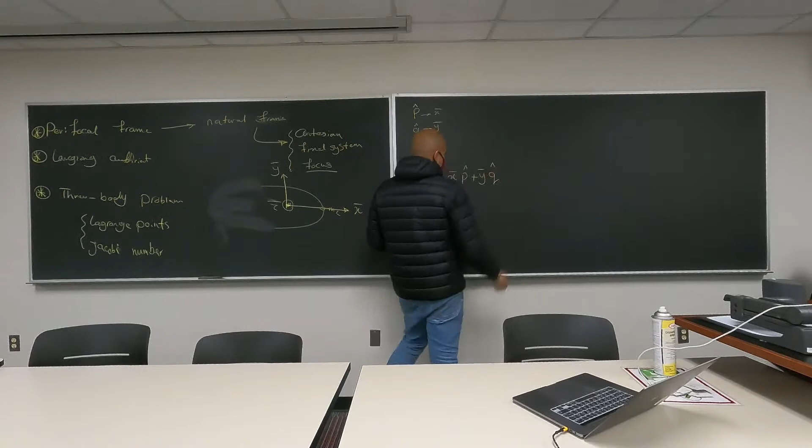You can define your R as X bar P plus Y bar Q hat. And the relationships between the cylindrical coordinate system and the Cartesian coordinate system are applied here. So your X bar is R cosine of theta, and Y bar is R sine of theta.

We have already said that these two lie on the same plane, meaning that this orbit is essentially a two-dimensional thing. But why do we introduce a third dimension when we are talking about this perifocal or natural frame? Why do we do that? That's my question for you.

What is the parameter that is in that direction, normal to the board here? Is this the right-hand rule with the up vector outwards? Yeah, that's the direction of the Z coordinate. Is that your question? So, does it?

Never mind. What is the parameter that is directed outward or inward, perpendicular to this natural frame? What is the direction of R? Something like this, right? What is the direction of velocity? Tangent to the plane, right? Or R dot. Doesn't really matter, it's to velocity.

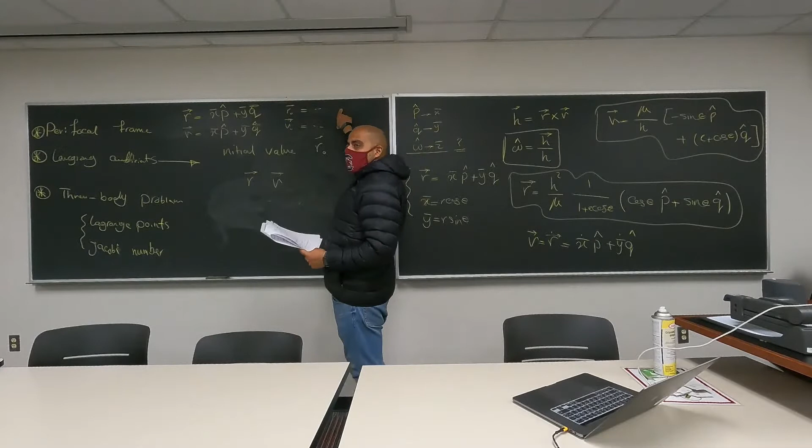So in a perifocal frame, your R is going to be equal to x bar p hat plus y bar q hat. V is going to be equal to x bar dot p hat plus y bar dot q hat. And we can write the same thing for R naught and V naught: x naught bar p hat, and so on and so forth. The idea here again is to use these two that are given to us and find this new R and V at a different time step.

We have all of the orbital equations, we have a lot of things that we can actually employ here. And what we want to do with Lagrange coefficients is to simplify the calculations, to come up with some parameters that will help us just plug in some numbers and find the new R and V based on R naught and V naught. If you do the analysis, you will get to these two main equations that relate your R and V to R naught and V naught.

R is F times R naught plus G times V naught, that's one Lagrange coefficient, and V is going to be F dot R naught plus G dot V naught. So these four are called the Lagrange coefficients that are going to help us find the parameters R and V at a later time. But I'm not going to go into the proof of these, we are only going to focus on the final equations and the concepts. Again, these four Lagrange parameters are going to help us find R and V at a different time, after some time has already passed.

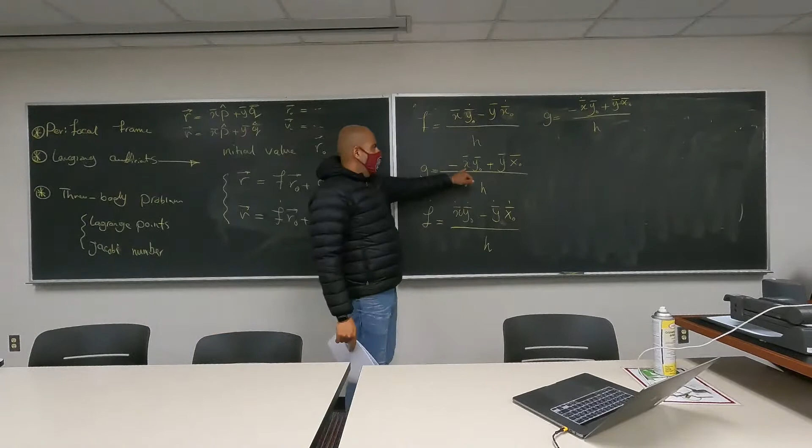Well, as you can see here, what do we have in these formulas? We have the presence of x bar and y bar, which are essentially the x and y in the future point that you're looking for. So this solution is not very helpful for us, right? Although these are the Lagrange coefficients, these are the first thing they derive, but it's not very helpful to us.

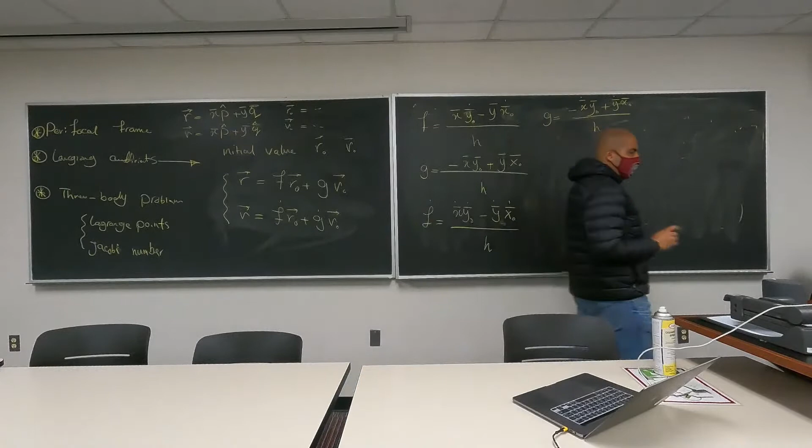So what can we do to eliminate this problem, to essentially only have one parameter from the second orbit, which is going to be the true anomaly, right? And then find it out. So what we want to do is to find these four coefficients based on delta theta, the true anomaly. Theta is the true anomaly at the second position.

This is something we need to have, right? Because we want to find R and V at the second true anomaly. That's the idea, right? That was the first thing that we started this whole thing. And theta naught is also given to us, right? This is something we already have. Okay?

So, plug in the values again. Your F based on the delta theta is going to be 1 minus mu r divided by h squared, 1 minus cosine of delta theta, right? Here G is going to be equal to R R naught over h, sine of delta theta, right? And your F dot is going to be equal to, this is a long equation, mu divided by h, 1 minus cosine of delta theta divided by sine of delta theta,

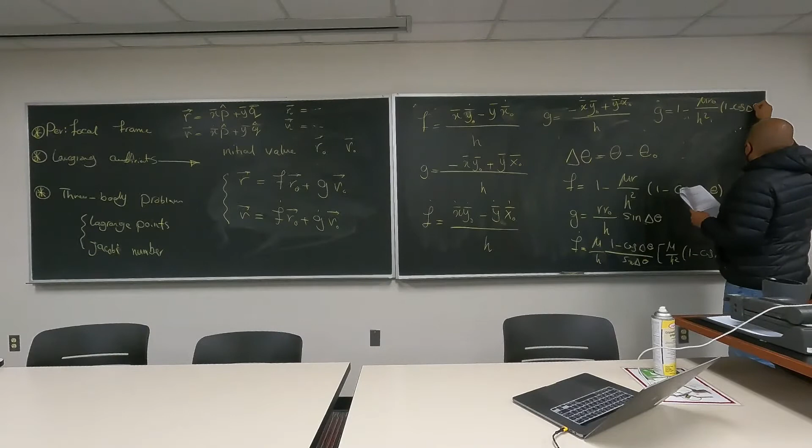Okay, so what are the parameters we have here? We have delta theta, which we can easily find, right? This is essentially given to us. We have R naught, which we can find based on the orbital equation, right? But there is one more thing that we don't have, and finding it is going to be a little bit harder for us. R, right? It is the magnitude of this vector, this future vector.

So we have another equation for that magnitude of the future vector that I'm going to write here. We can find R using something that is similar to the orbital equation, the main orbital equation, but only uses delta theta, doesn't use theta for that matter. Cosine of delta theta, this is minus, all of this is in the denominator. H V R naught divided by mu, sine of delta theta.

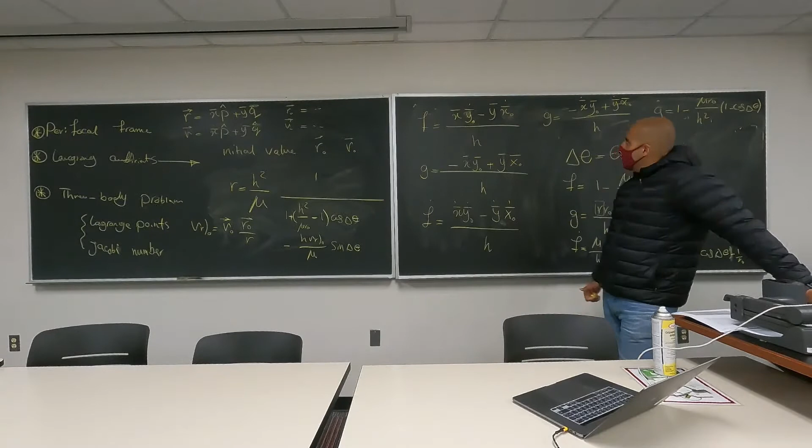Okay, so you're actually going to come back to this. Let's actually do it right now.

Let's solve an example. But before solving an example, take a look at these equations. We have this given to us, as well as R and V, right? Some form of them is given to us. F, G, F dot, G dot, and these equations are going to help us find a future orbital position and velocity, right? Find it from the initial value of that orbital position and velocity.

What is a very important parameter that we don't have here? Just look at these equations. What is missing in these equations? In these equations that I have, this one, these three, and these. Momentum, angular momentum, right? It is here. It is eccentricity, right? So we are missing the eccentricity, or not missing, you don't need to have eccentricity if you use the Lagrange coefficients, right?

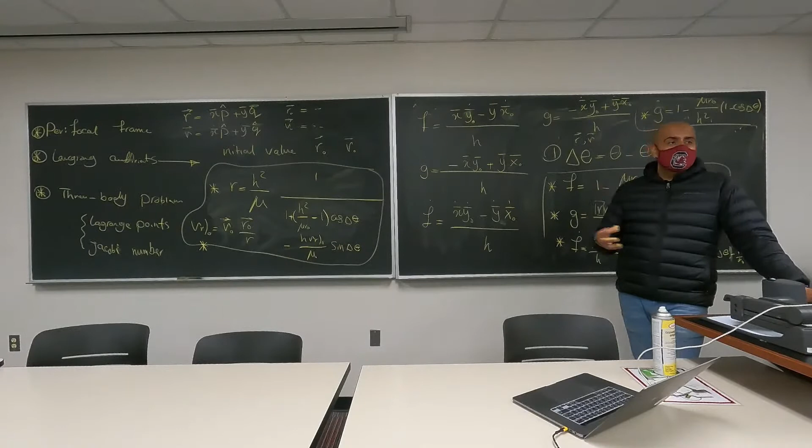What does it mean? This essentially means that we don't need to know what type of trajectory or orbit we have here. Is it elliptical? Is it circular? Is it a parabolic trajectory? It doesn't matter. We don't need to calculate eccentricity, which means that in some ways it's going to make everything easier if you don't need to determine what type of orbit you have. You just want to find the second position using the initial position, right?

Okay, let's take an example. There is example 2.13 of the book. Let's actually go over it very quickly. An Earth satellite moves in the XY plane of an inertial frame with the origin at the Earth's center, right? Relative to that frame, we have R naught. First of all, you are told that you have an inertial frame with the origin at the Earth center, which is your focus. So we are talking about perifocal frames, right? The first thing we discussed here.

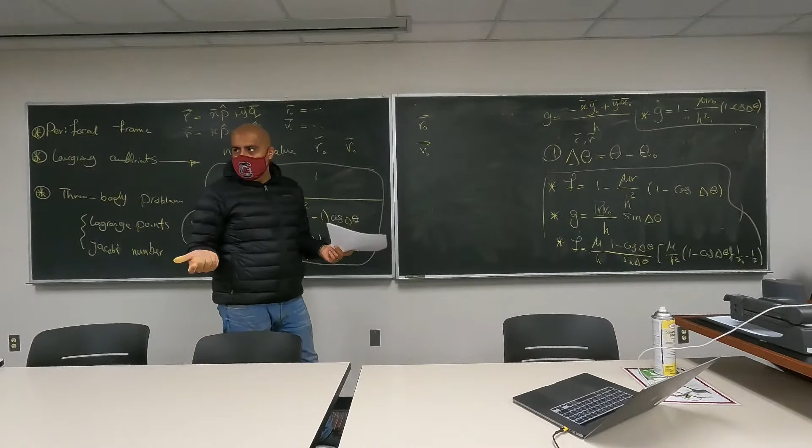Your R naught is going to be equal to 8,182.4 I hat. It could have been P hat, but for whatever reason your book is not consistent here. It doesn't really matter. J hat, and V naught is equal to 0.47572 I hat plus 8.8116 J hat. So we are given R naught and V naught.

We want to compute the position and velocity vector after the satellite has traveled through a true anomaly of 120 degrees. What does this piece of information mean? Theta is equal to 120. Is it theta or delta theta? Delta theta, right? So we are going to assume we start at a specific true anomaly, then we travel 120 degrees. Just make sure that you don't make that mistake. Okay, so delta theta is given to us as 120 degrees.

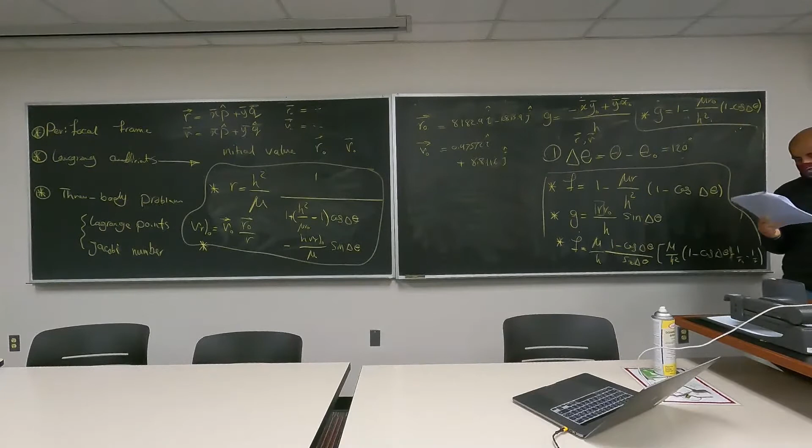So what do we need to find here? It's Earth, so we should have mu, right? Mu is usually given to you, from the mass of the Earth. Let's see. That's 398,600, right? That's the mu of Earth. Usually memorize that, 398,600, however you say it. Okay, mu is given to us. What else do we need? We need to calculate the magnitude of R naught. How do we calculate that? From the vector. Pretty simple, right? What else do we need?

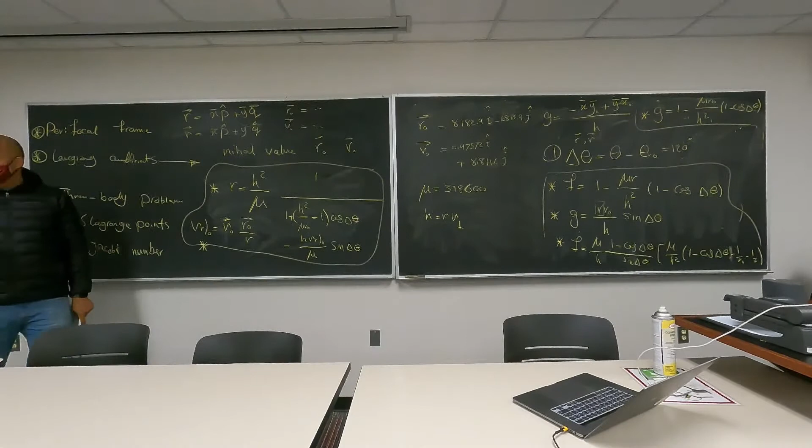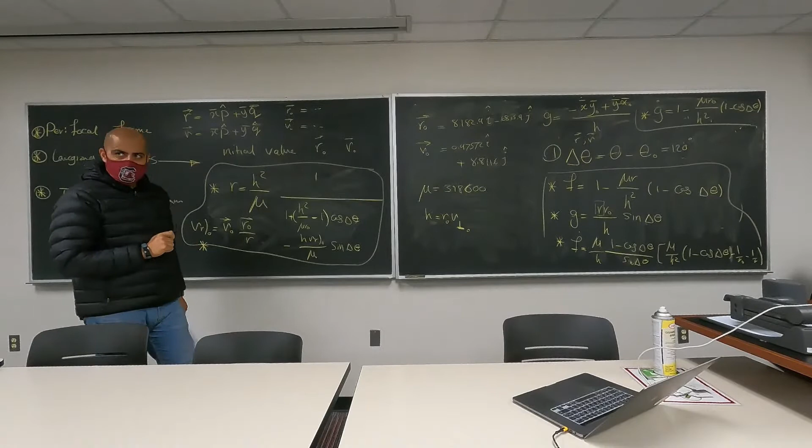Angular momentum. How do we calculate angular momentum? There was a relationship between angular momentum, the azimuthal velocity and the position vector, right? That equation was R times V azimuthal. How can we calculate the azimuthal velocity? We have V, and we can calculate VR using the dot product of V naught and R naught divided by the magnitude of R. And how can we get azimuthal velocity from that? H over R? Sorry, that was for circular, where V equals V azimuthal. Never mind.

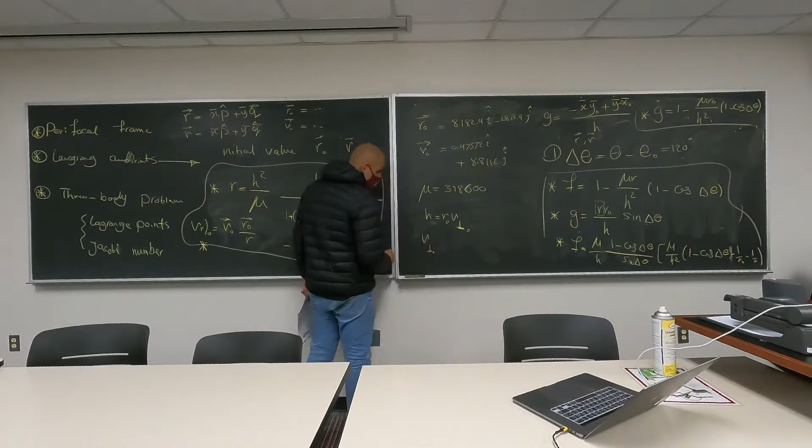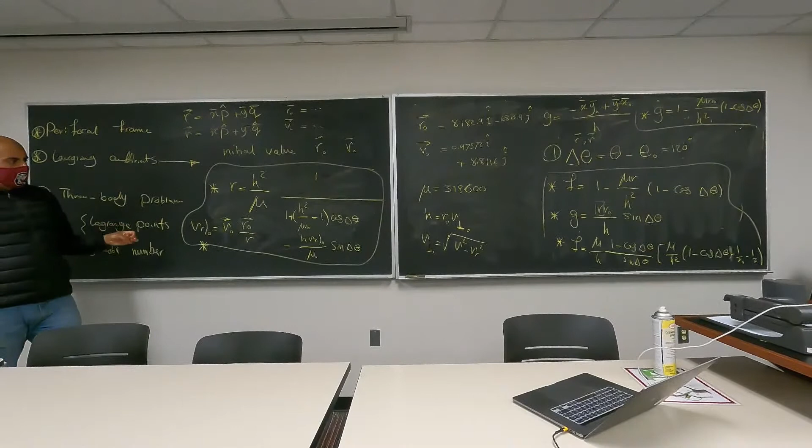V azimuthal is going to be equal to the square root of V squared minus VR squared, right? It's just a vector relationship. We can calculate VR here, since we are given the velocity vector. Just plug it in, and you have the azimuthal velocity, which means you have the angular momentum. So we can find R as well from those equations. Then you plug into your main equation to find the Lagrange coefficients and find the new velocity and position vector. Is this clear or is it confusing?

It's clear, I just lost the equations. Okay. Clear? What about the V? Which V? This one? These are V naught, right? So we are given V naught. But V at a future point is the thing we want to calculate. So you find the Lagrange coefficients, and then use the main equations I gave you: R equals F R naught plus G V naught, and so on. Those two main equations I gave you.

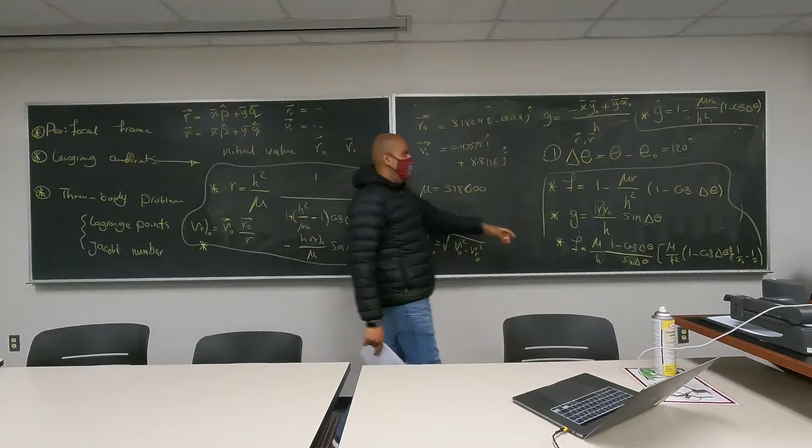One part of your homework will be to go over some parts of the book that transform this from delta theta to delta t, right? So a time difference. You will be given an R0 and V0, and I will tell you that this much time has passed. Give me the new position vector, right?

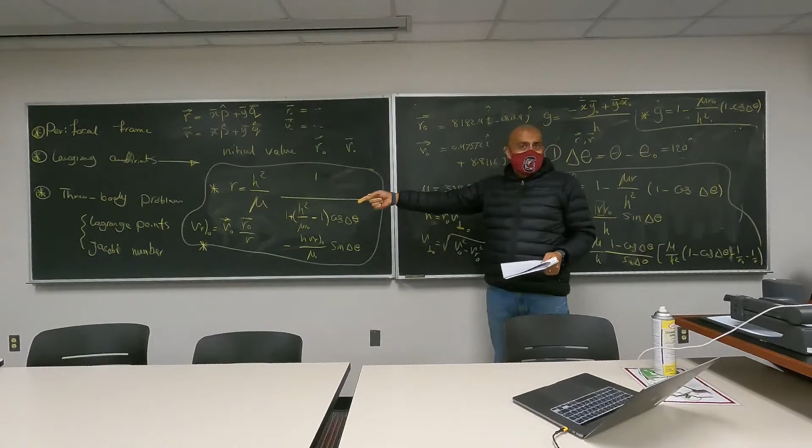But there are already long equations. I don't want to go over that in class. So you will get one question on the homework that will ask you to summarize that part of the book, right? So your assignment is going to be to go there and read that part of the book.

Okay, so let's move on to the circular restricted three-body problem, which is the last topic we are going to cover in this chapter. This is the circular restricted three-body problem. So this is a special type of three-body problem, not a very general one. We have another chapter on this, which I don't think we're going to get to this semester.

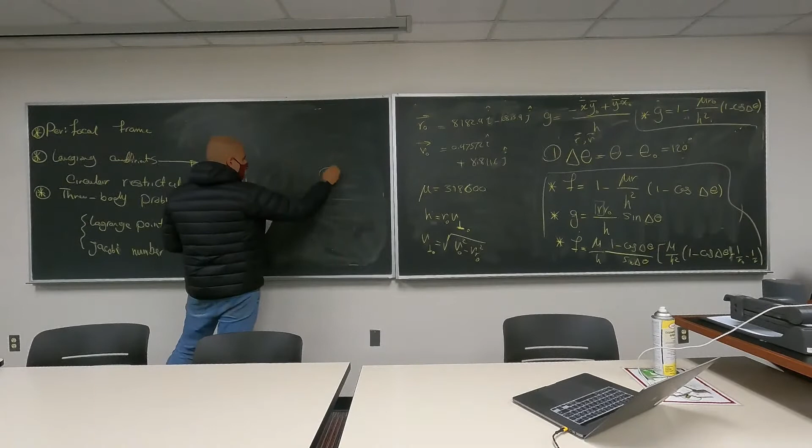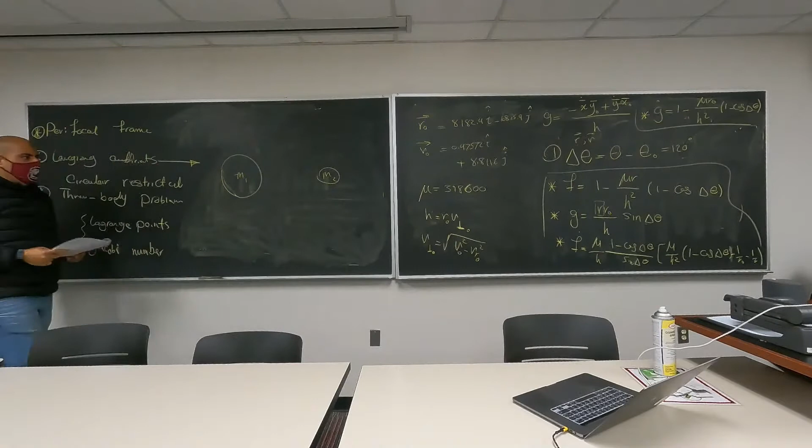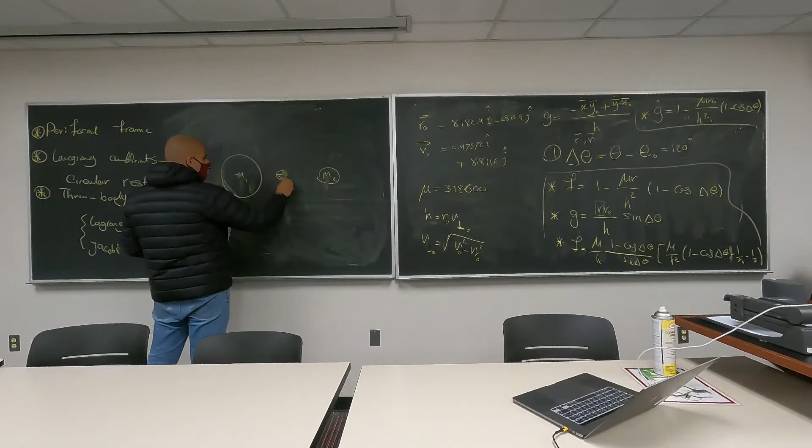The first thing you want to do is consider two bodies, M1 and M2. One is bigger than the other one. You want to put a co-moving frame on their center of mass. So a co-moving frame at which the x-axis is on the vector connecting the center of mass of the two bodies.

Y-axis is on the plane of motion of the two bodies, right? And z-axis is perpendicular to the x and y-axis. Okay. So the center of this frame is a co-moving frame. It's moving with these two bodies, right? Center of gravity. The only movement it has is a constant rotation, right? It's just a constant rotation.

And we can find this rotation, omega, as 2 pi over T. You already have the formula for the period. Your period is going to be equal to 2 pi divided by the square root of mu, times the position vector between the two centers of mass to the power 3/2. Okay? Which means that your angular velocity omega of that co-moving frame of reference is going to be equal to the square root of mu divided by R12 to the power 3.

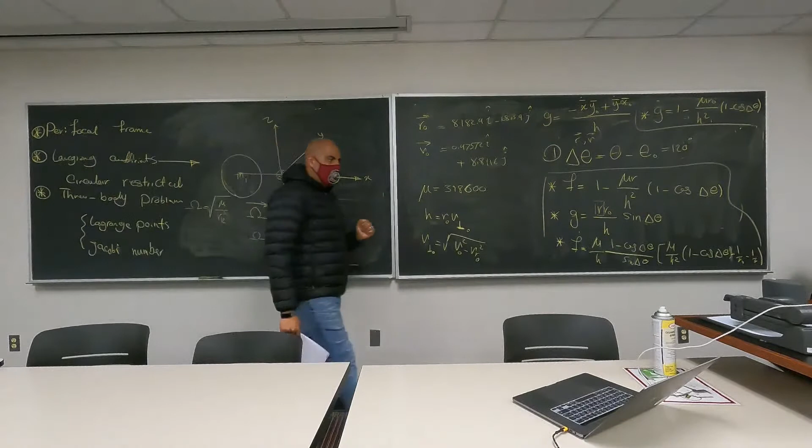Okay, so we have two masses. So far, it's only a two-body problem. We have two masses, right? You have a gravitational force. We put a co-moving frame of reference on the center of gravity, and we are finding the relationships for these two masses. How can we find the mu here? Mu is equal to G times M1 plus M2. We are going to use capital M for M1 plus M2, so your mu is going to be GM.

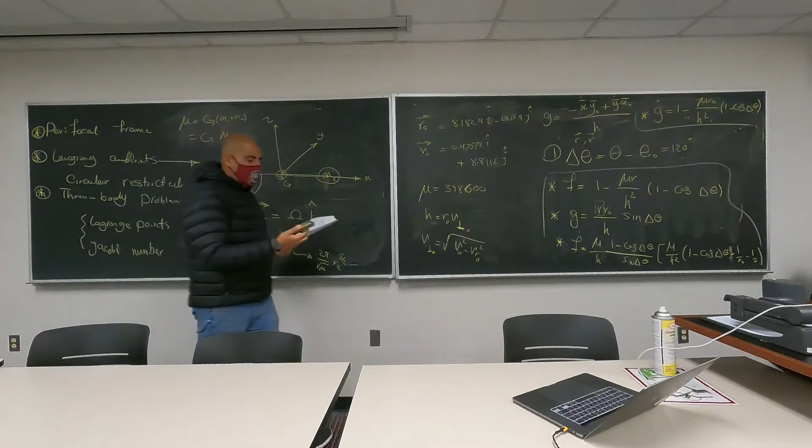And since we are putting the frame of reference on the center of gravity, its velocity is going to be zero. It's not going to move. And I'm sorry, let me just do this further. And its location is the center of the coordinate system, so its location is also centered at 0. So for x0, we can find this relationship: m1x1, which is this x, plus m2x2 is equal to 0, right?

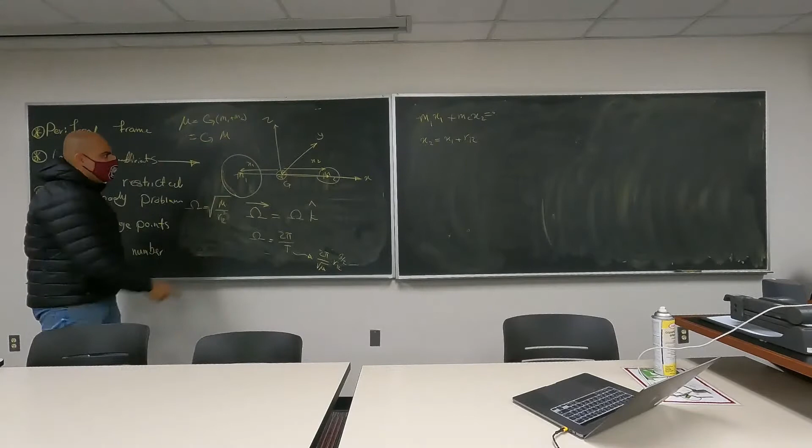And the direction here is also important. So between x2 and x1, we can say x2 is x1 plus r12. x1 is in this direction, right? And r12 is this. So x2 is essentially r12 minus x1, but it's a vector in the other direction, so it already has a negative value, right?

Okay. Then, using this equation and these two equations, and by defining pi 1 and pi 2, which are dimensionless mass ratios, we can come up with these two relationships. x1 is equal to pi 2 r12, x2 is equal to pi 1 r12. Pi 1 is m1 divided by m1 plus m2. And pi 2 is... dimensionless mass ratios.

So we have found the position vector of each of these masses for that co-moving frame of reference. Okay. Let's actually add a third mass here. A third mass m, whose mass is very small compared to both M1 and M2.

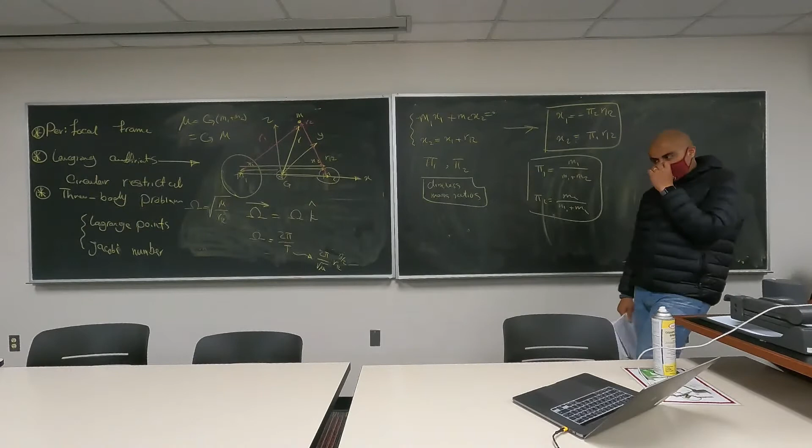So at this point, we are only concerned with the satellites that are orbiting around the Earth-Moon system. So R1 can be calculated as: the x part of it is going to be x minus x1 i plus yj plus zk. R would have been xi plus yj plus zk, but for R1, its x is the only thing that is changing, right?

We can do the same thing for R2. We can write R1 as a function of pi here to be x plus pi2 R12 i plus yj plus zk. We can do the same analysis for R2. R2 would be equal to x minus pi1 R12 i plus yj plus zk. So we have the position vectors, and I already said R is xi plus yj plus zk. We have the position vectors, which essentially means that we can find the r dot and also the acceleration.

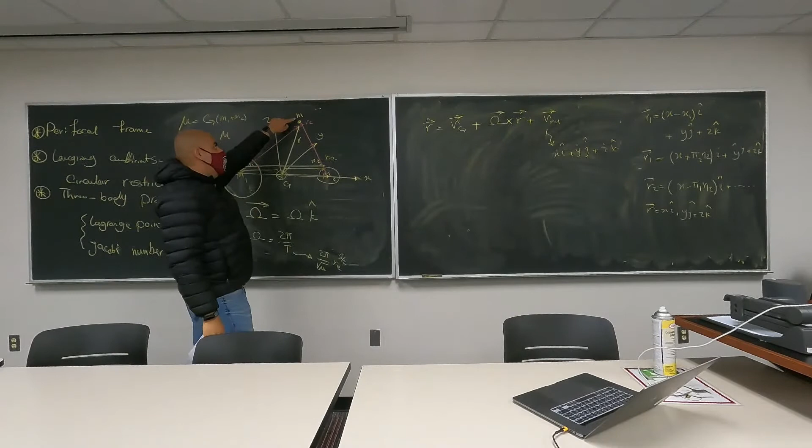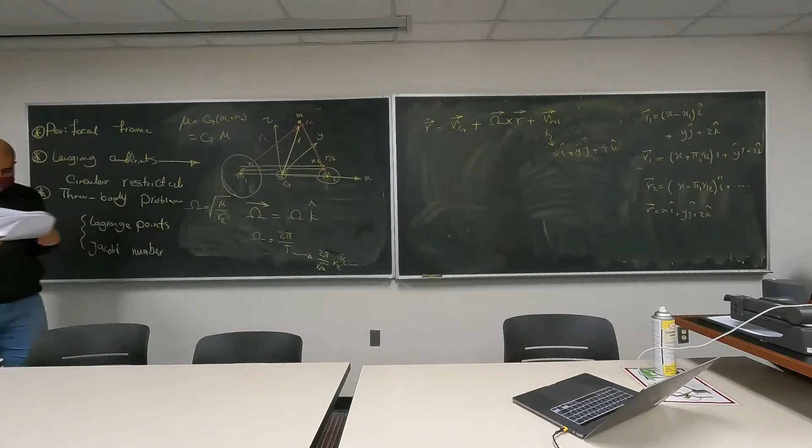We already know that v relative is x dot i plus y dot j plus z dot k. That was the idea of the relative velocity: the velocity of m relative to your co-moving frame, not relative to an inertial frame. But this whole thing gives the velocity relative to an inertial frame. Okay? And r double dot, very large equations. These are something we have seen here.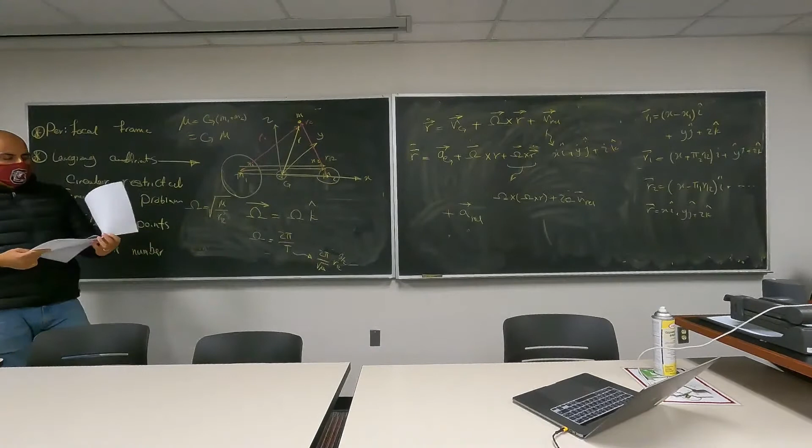It's going to be a_G plus omega dot cross r plus omega cross r dot, and if you recall, we replaced this with omega cross omega cross r plus 2 omega cross v relative, and all of these are vectors, plus a relative. But we already know that this co-moving frame is moving at a constant speed and also a constant angular speed. So we can simplify the equation, let me rewrite it up here, to have the a relative. So that's one part of the equation of motion.

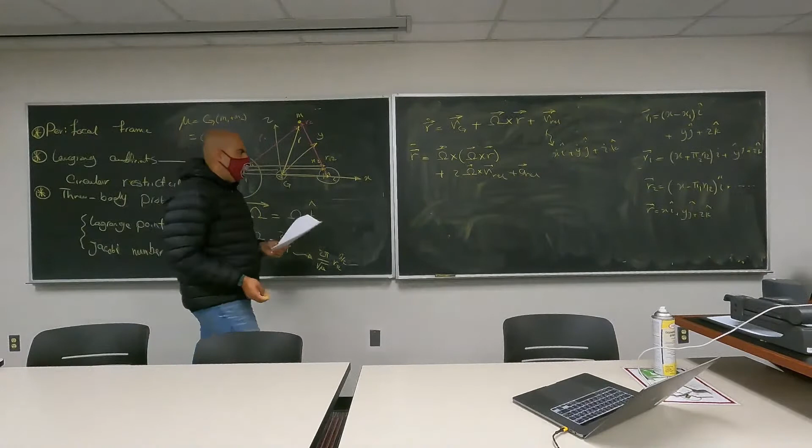We have R double dot now, right? How did we find the equation of motion? In general, we said sigma F equals m R double dot, right? That was always the main idea. Okay, we have R double dot on one side, and we have two forces, F1 due to mass 1 and F2 due to mass 2.

How do we find F1? That's negative G m M1 divided by R1 squared u_R1, right? And negative G m M2 over R2 squared u_R2. Which we have already seen in the earlier part of this chapter is going to be equal to negative mu1 m divided by R1 cubed multiplied by R1, and mu2 m over R2 cubed R2. Okay. Is there any question here? These are the things that you have already seen.

Okay, so what would be the final equation of motion here? M R double dot is equals to sigma F, right? The M's will cancel out from the two sides.

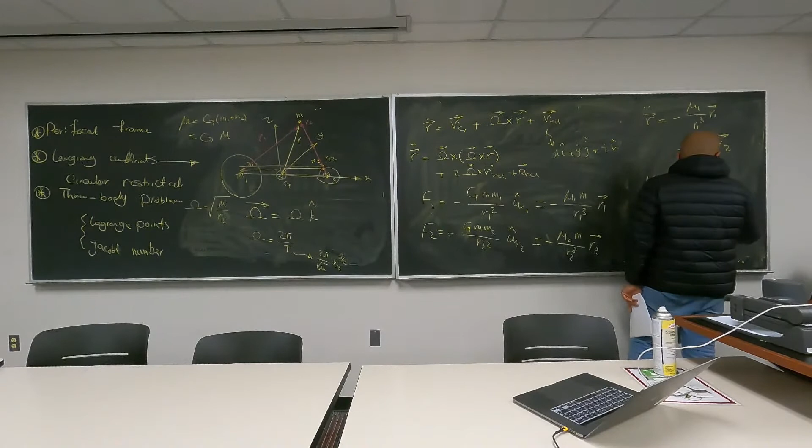We already have the values for R double dot and also R1 and R2. We have these vectors, we can put them in and have the equation of motion in different coordinates, X, Y, and Z. So we can have three different equations of motion, but we cannot really solve it any further without making some simplification. Let me give you these final equations in each direction.

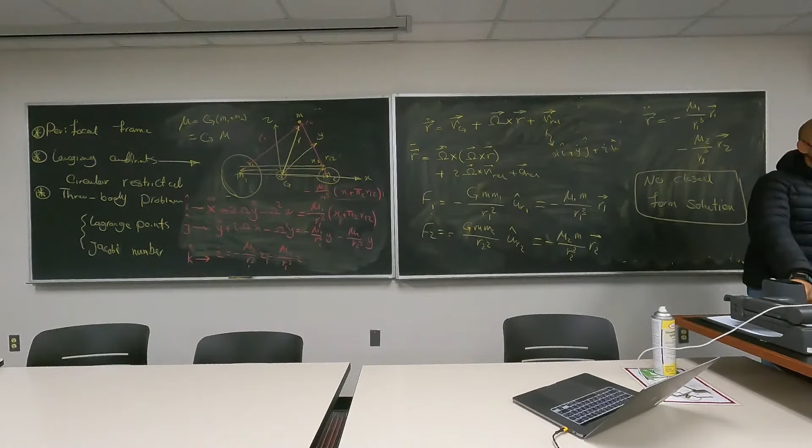So what we can do, though, is use these equations of motion to determine the location of equilibrium points and some other parameters, instead of finding the real orbit. We cannot find the real orbit. That's the idea. That's what no closed solution means.

These equilibrium points, are we all following? It gets boring after some point, all of these equations. And I understand that. Because orbital mechanics is boring, after some point.

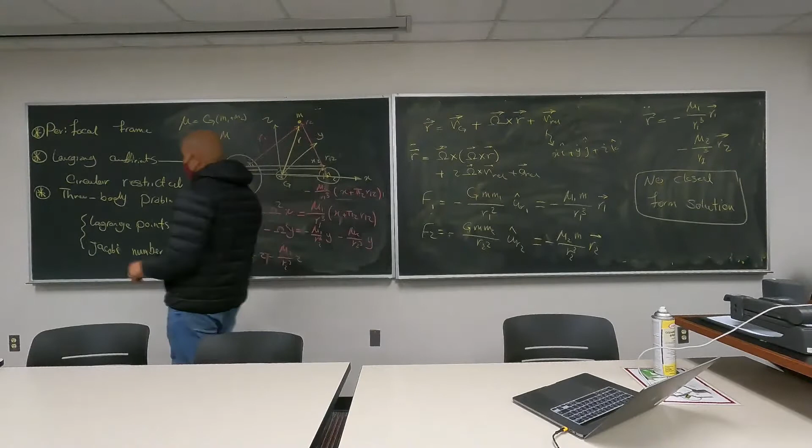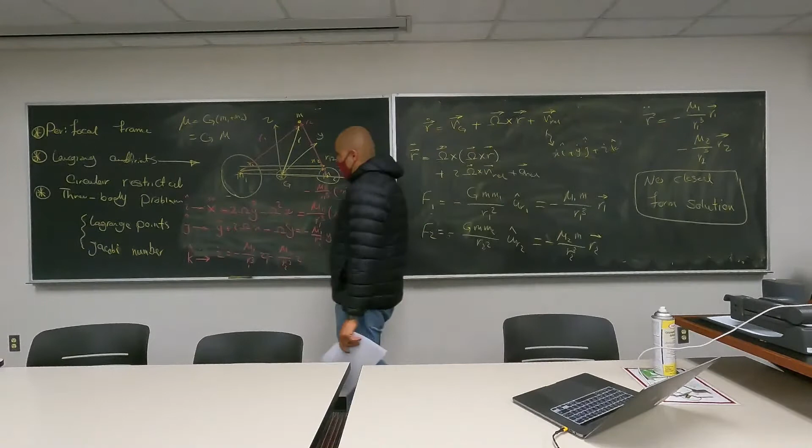So the next step is to find the equilibrium point, or the Lagrange points. We have the equation of motion for the three-body problem. Next step is to use this equation of motion to determine some parameters. We cannot determine the whole orbit equation, but we can determine some parameters. One of these parameters is the equilibrium points, or Lagrange points.

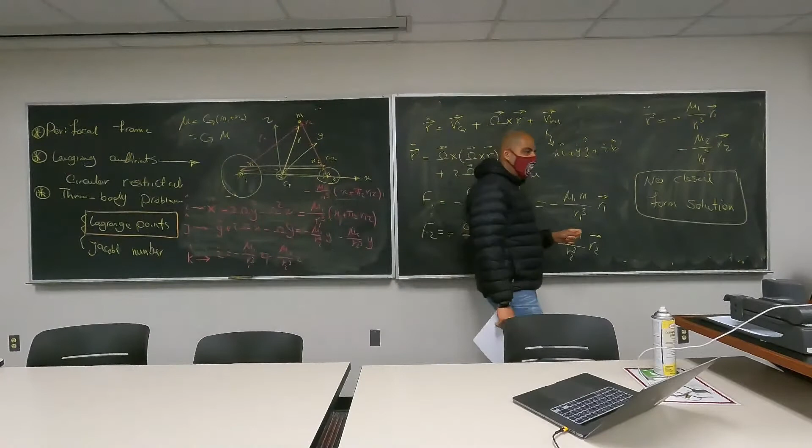So it's different from the Lagrange coefficient. Lagrange was an active person when it came to orbital mechanics, a lot of things are named after him. So let's make sure not to be confused.

But what are these equilibrium points or Lagrange points? Equilibrium points, or Lagrange points, are the points where you have zero velocity and zero acceleration. So these are the points where, if you put your third mass in those points in these two orbits, in a two-body orbit for example, that point mass won't move.

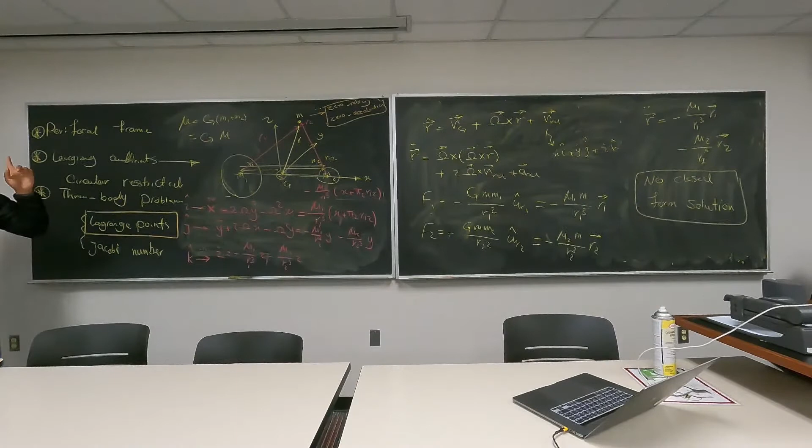So if you are standing on Earth, or on the Moon, or on the center of gravity, and you look at a mass, that mass won't move. If you are in an inertial frame, that mass is moving in a circular pattern, in a circular orbit. But from these points of view, that mass is not moving. And that is called a Lagrange point.

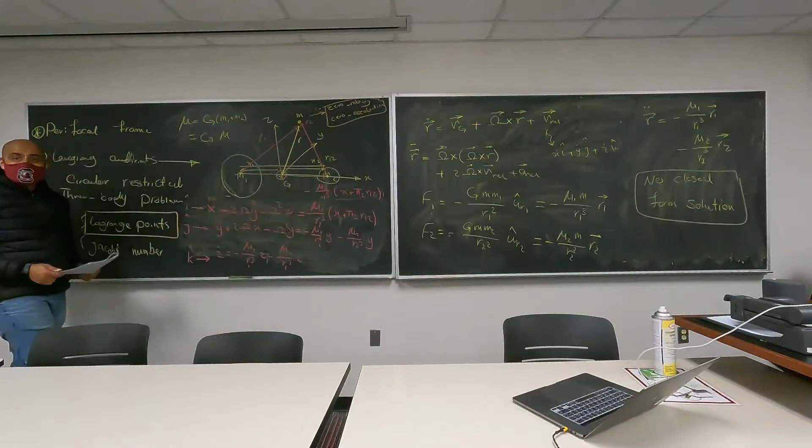There are actually multiple points you can find, it's not just one point. There are 5 points in this specific case. But how can we find these 5 points? Pretty easy, the acceleration and the velocity have to be 0.

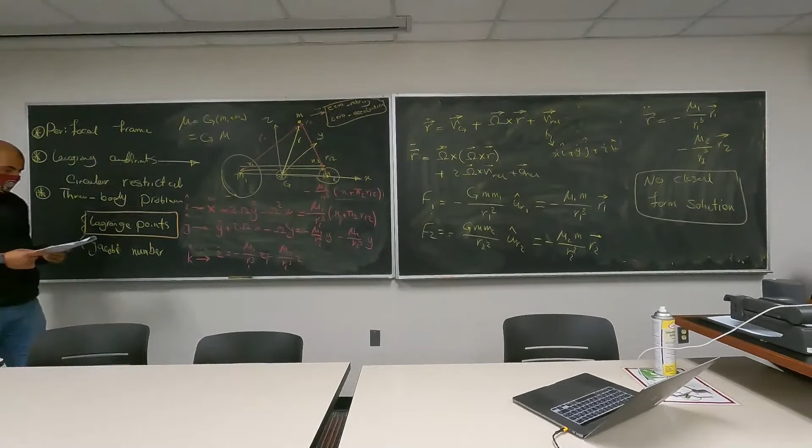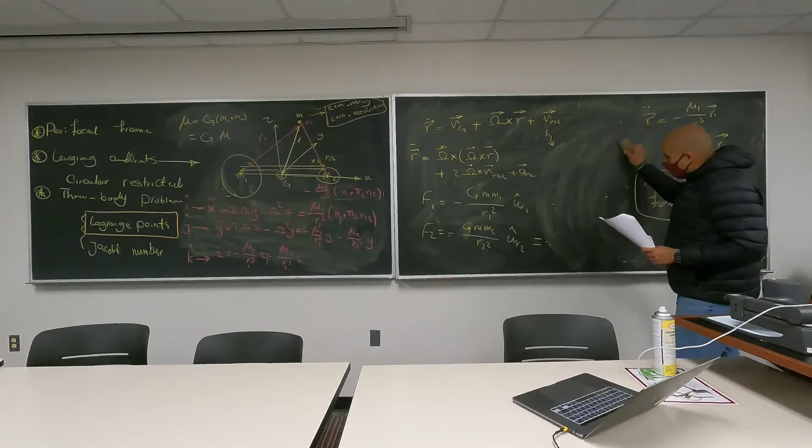So what does it mean for these 3 equations? You have to put x double dot, y double dot, z double dot equal to 0. Same is true for x dot, y dot, and z dot. If you put them equal to 0, you should be able to find a specific x and y, or 5 specific x and y's for that matter. Which, if you plug in those numbers, you will see that that is also not possible without an iterative method. We can only find 2 Lagrange points that way.

Using this simple method, we find two Lagrange points, L4 and L5. How do you find them? X is equal to R12 divided by 2 minus pi2 times R12. Y is going to be equal to plus or minus the square root of 3 divided by 2 times R12, and z is going to be equal to 0. So these are two of the Lagrange points.

For L1, L2, L3, you have to do an iterative analysis. It's not very complicated, but it has a lot of mathematics involved in it. That's how you find those Lagrange points.

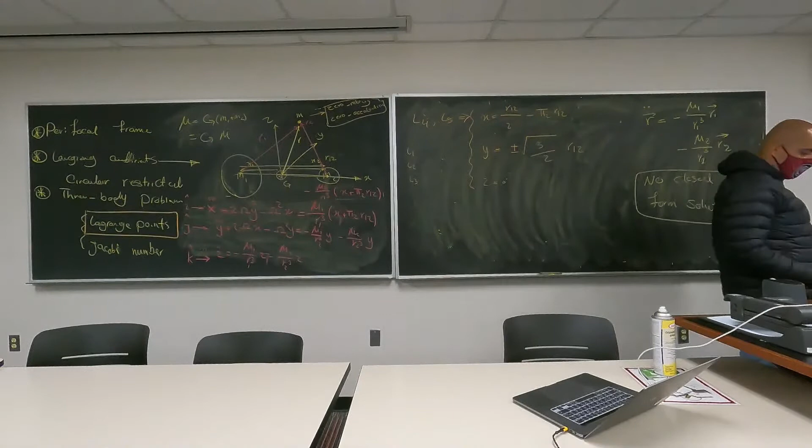Okay, we have put the best for last: the Jacobi number, or Jacobi constant. It's a very important parameter when it comes to the circular restricted three-body problem. We have the equations of motion.

What we want to do is find the living force equation for this specific circular restricted three-body problem. What was the living force equation? Who remembers? It was essentially the energy equation, right?

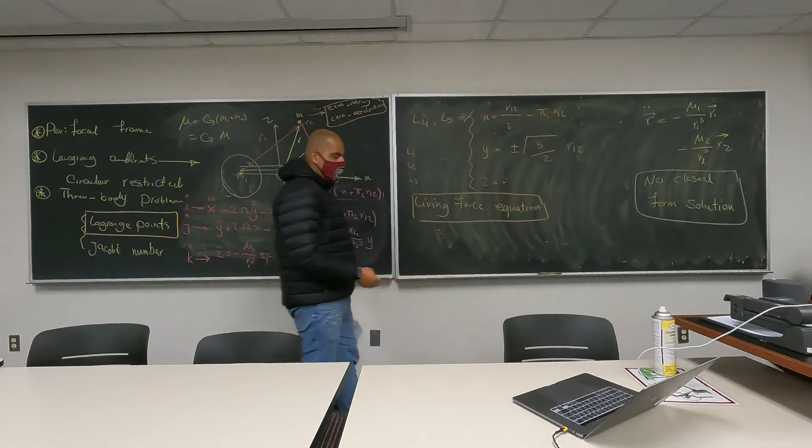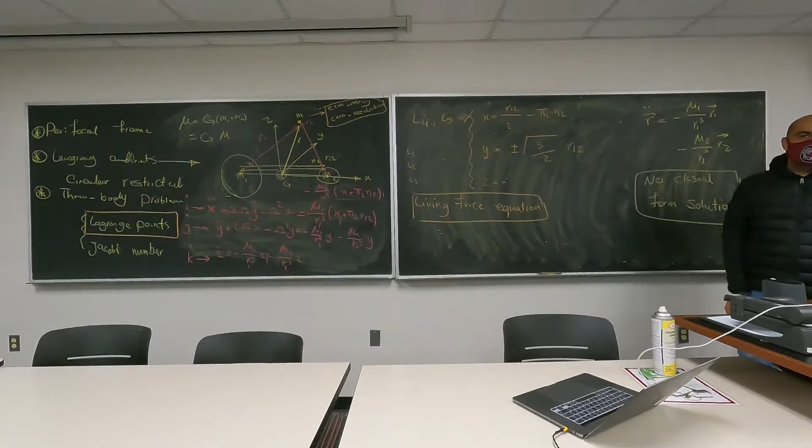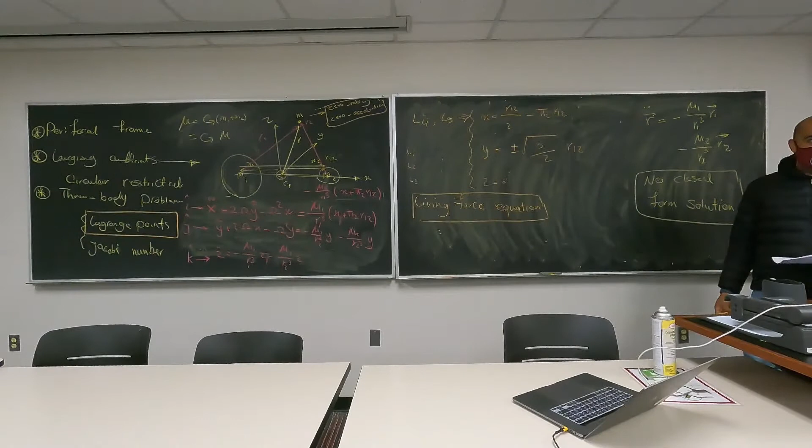This is something we saw earlier, right? It is called the living force equation, actually a French name. I don't remember the French word for it, so the English translation is living force equation. It's essentially the energy equation. What was the energy equation for a two-body problem? We had the kinetic part, V squared divided by 2. We had the potential part, mu divided by r, which equals your epsilon, that was negative mu divided by 2a.

That was the idea for the two-body problem. So now we have a three-body problem, and we want to find this living force equation. We're not going to go over the derivation, I'm just going to give you the final equation. You have v squared divided by 2, that's the velocity of this mass, minus one half omega squared, that's the angular velocity of your co-moving frame, times x squared plus y squared, minus mu1 divided by r1, that's the potential from the first big mass, minus mu2 divided by r2, and that's all equal to a constant value C.

In the other case, we had a constant value epsilon, which was a negative value for what type of orbit? Who remembers? Elliptical.

Why is it a negative value? So the specific energy of your mass M2 that's orbiting is negative. What does that mean? What do you get from that? Is that a decaying orbit? Is your specific energy decreasing? It is not decreasing. The specific energy is negative, it's a constant negative value.

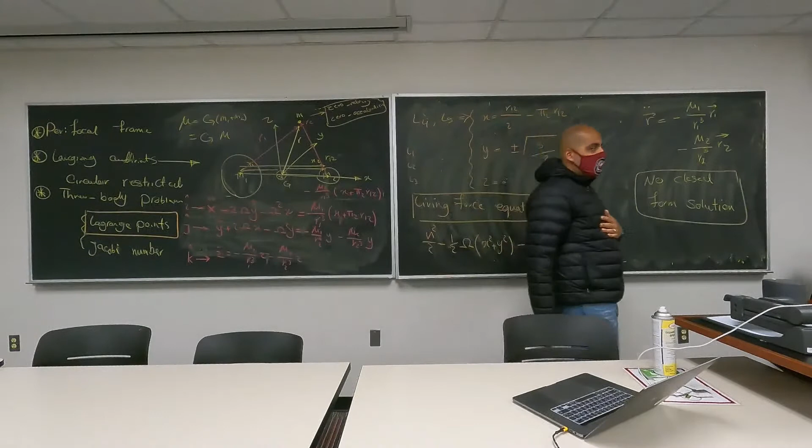So your mass M2 has a negative energy. And I thought negative energy wasn't possible. But we have talked about this, right? Negative energy, yeah, in orbital mechanics. What does a negative energy mean here? The best I've come up with is that you're taking energy away. Okay, let me answer the question.

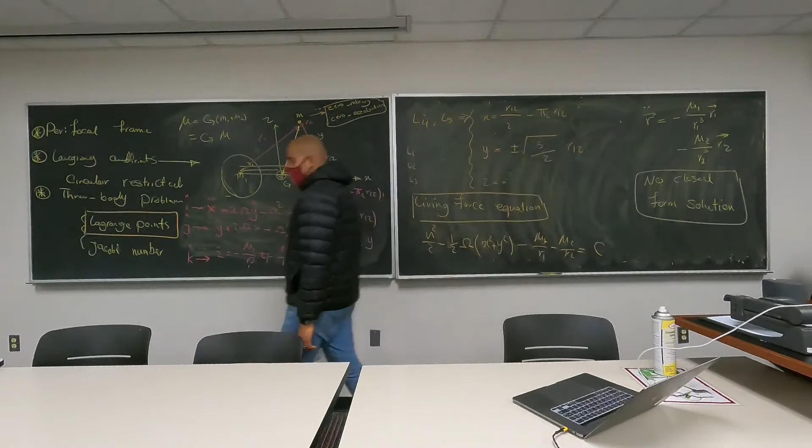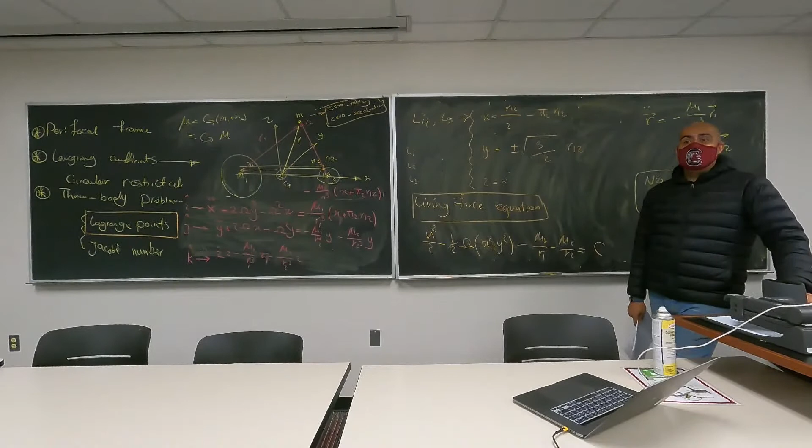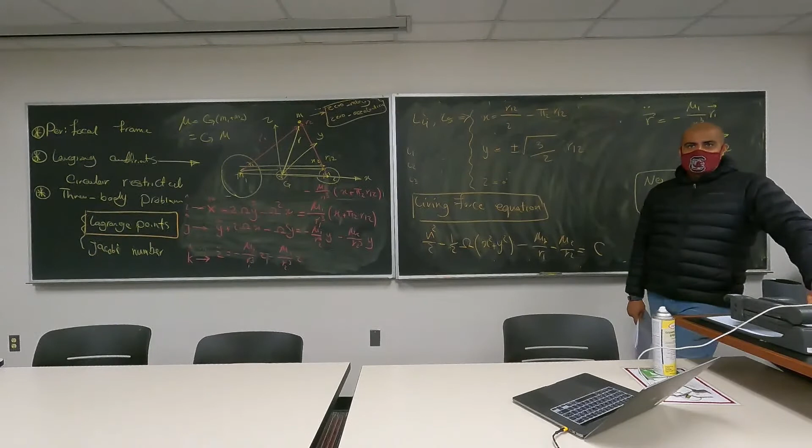We have actually talked about this, and it's very important for you to understand what negative energy means here. Negative specific energy means that you are stuck in the gravitational pull of Earth, right? That's why you have a negative energy, you don't have enough energy to escape the gravitational pull of the Earth. You will have to add energy, right? That was the idea. Then we got to zero energy, and then we got to positive energy. Zero energy meant that you can escape the gravitational pull, but as soon as you escape, your velocity is going to be zero. What type of trajectory was that? Parabolic. And hyperbolic trajectory, you have excess energy, positive specific energy. The same idea applies here.

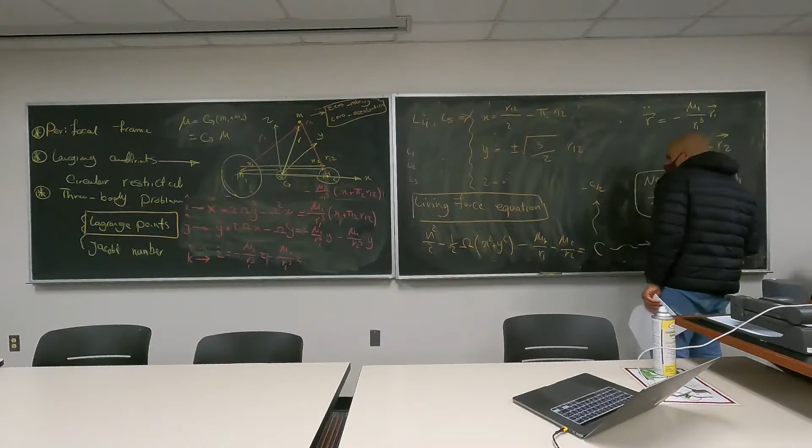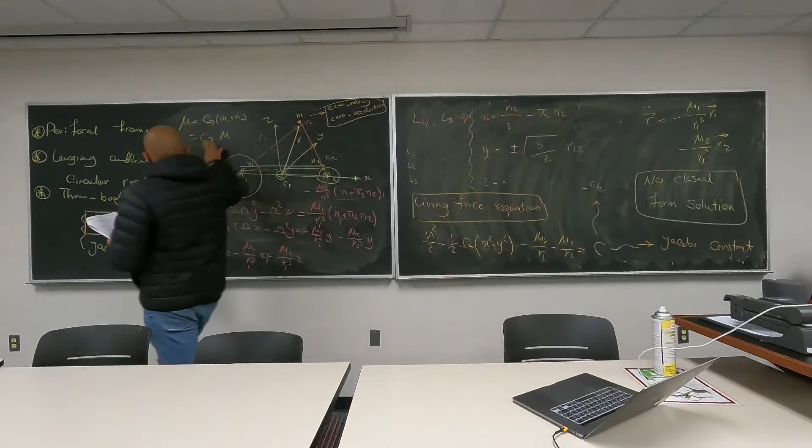And C is actually, or in literature, some people use negative C divided by 2 — they divide everything and put a negative sign. Here it's called the Jacobi constant, and it follows the same idea. If you move things around a little bit in these equations, you can come up with a formula for velocity, this is the magnitude of velocity.

It's going to be equal to plus 2mu1 divided by R1, plus 2mu2 divided by R2, plus 2C. This magnitude of velocity, this side of the system, always has to be positive. That's the idea, right? Left-hand side, velocity squared, always positive, which means this always has to be positive or zero. So we can come up with this inequality.

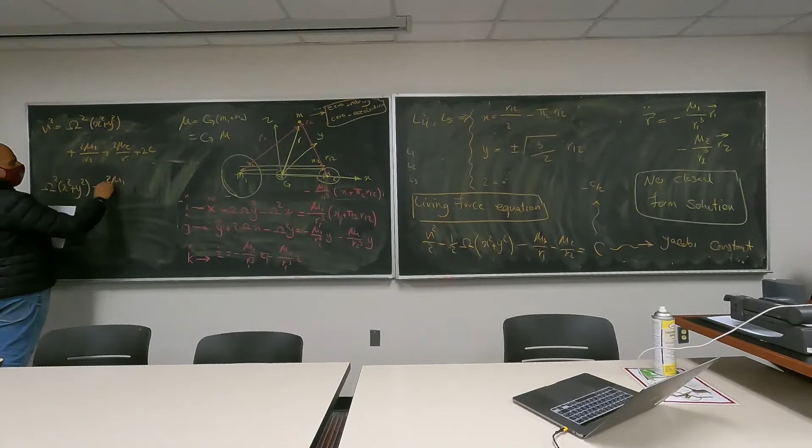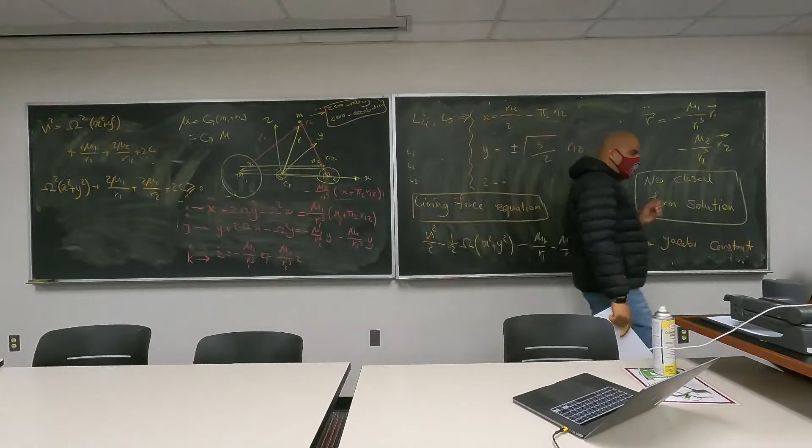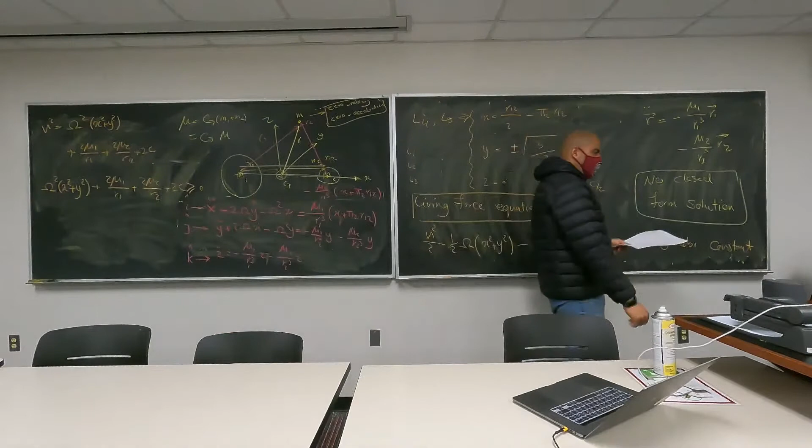This inequality is telling us that this value, or we can also say that your velocity value can never be negative.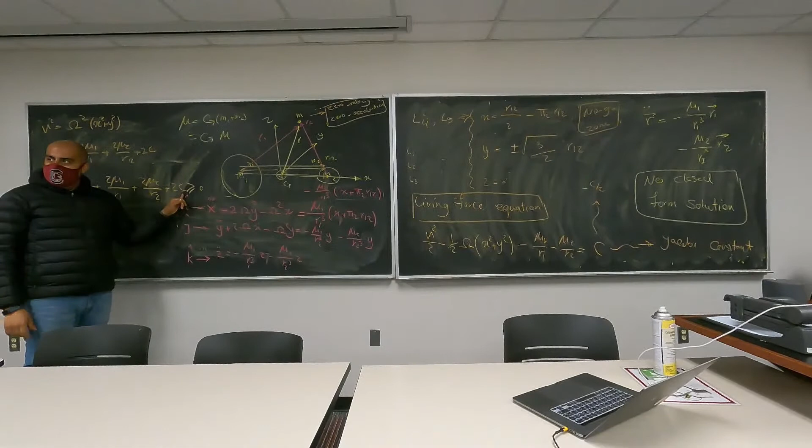So the value 0 here gives us the boundaries of the no-go zone. I'm the one calling them no-go zones, which essentially means that your satellite orbiting around Earth and Moon cannot go into some specific regions, right? And those regions, how big or small they are, can change based on the Jacobi number of that satellite.

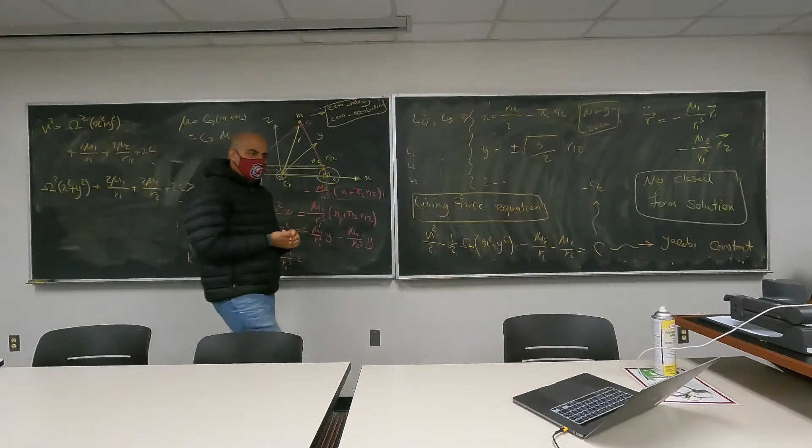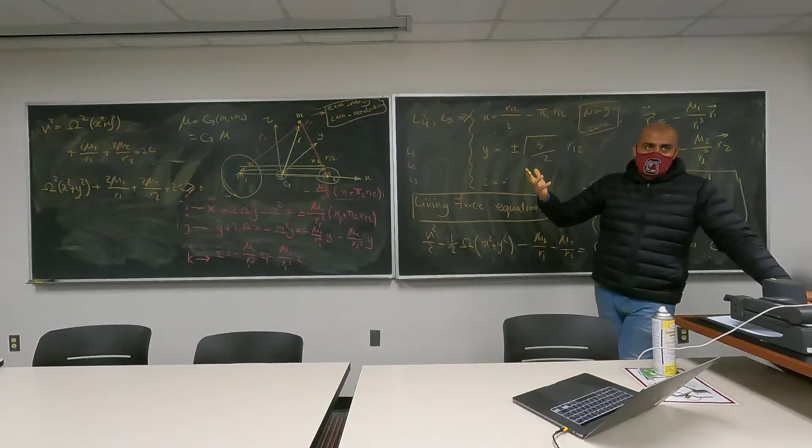Jacobi number, how much excess energy or lack of excess energy it has, that's the idea here. If you have a very negative number, think about it this way: the idea of negative energy was lack of energy to escape the orbit in a two-body problem. So a more negative Jacobi constant here means a lack of energy to escape either the orbit of the Earth or the orbit of the Moon, or both.

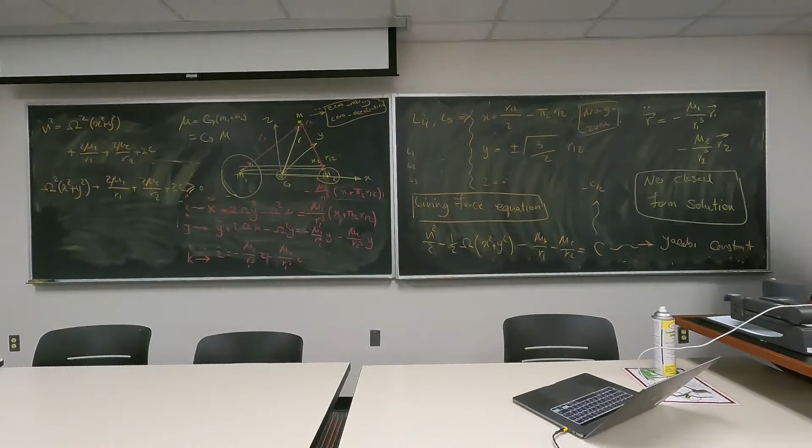So we have an analysis here that I want to show you. This is in the book, so we don't need to worry about it in detail.

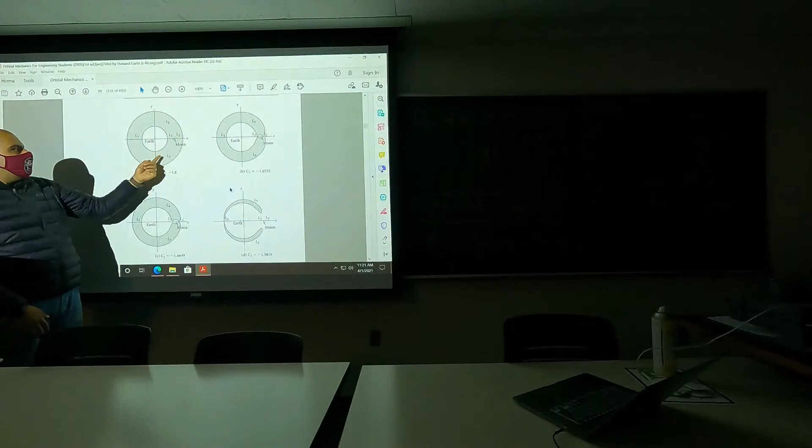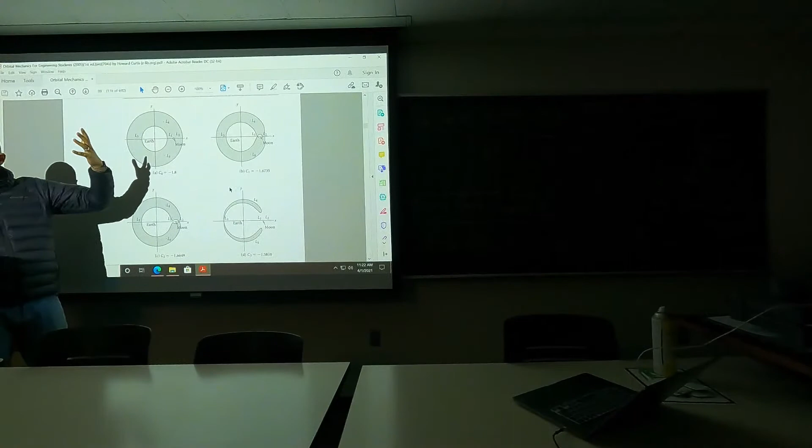So you have to make that Jacobi constant less negative. As you make it less negative, these shaded areas become smaller and smaller. These L points are the location of your Lagrangian points. So with a value of -1.8, you cannot even get to any of the Lagrangian points. What was the Lagrange point? The equilibrium points, right? That was the idea.

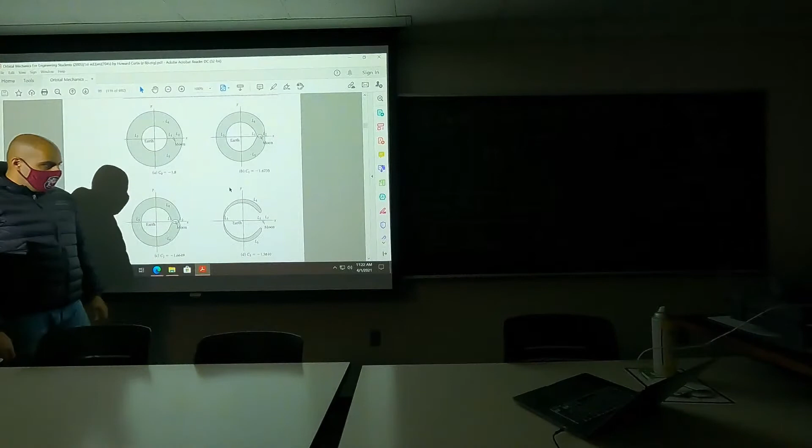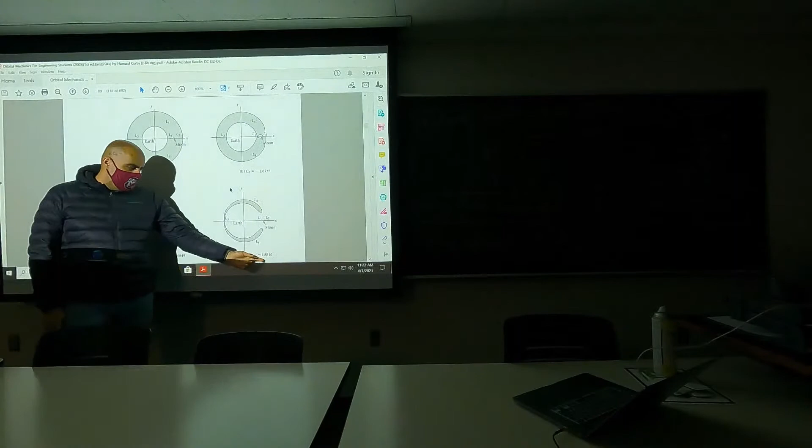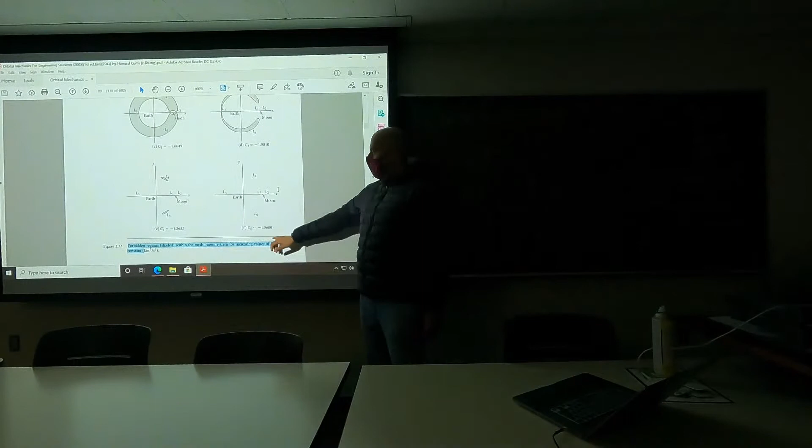As you make it less negative, you eventually make these no-go zones smaller and smaller. For a value of -1.581, your satellite can escape the gravitational pull of Earth and Moon and go out. And you can make it more positive until you get to a value of -1.56, which means it becomes easy for your satellite to escape the orbital pull.

So the -1.5683 case still has shaded regions over L4 and L5, which are the ones we're able to find. Why are those shaded? I'm just confused why they make such odd shapes, I guess, is my question. That's essentially the effect of the gravitational pull of the Moon, combined with the Earth's.

See, you start from this shape with two circles around them. Then you can see that because of the combination of the gravitational pull of the two bodies, it's strong here, and the shape is different here. Then the gravitational pull of the Moon is going to help you escape the gravitational pull of the whole three-body problem.

If you had another body here, I would assume it would look more symmetric, like a four-body problem. Yes. So when you have all these Lagrange points, if your satellite has a smaller negative value for the Jacobi number, and passes through one of L1, L2, L3, or L4, will it just stop there? No, it already has excess energy. You have to calculate the energy, determine the correct trajectory to send it there, and calculate the correct energy needed to get there. So if you have excess energy, it won't stop, it will keep going.

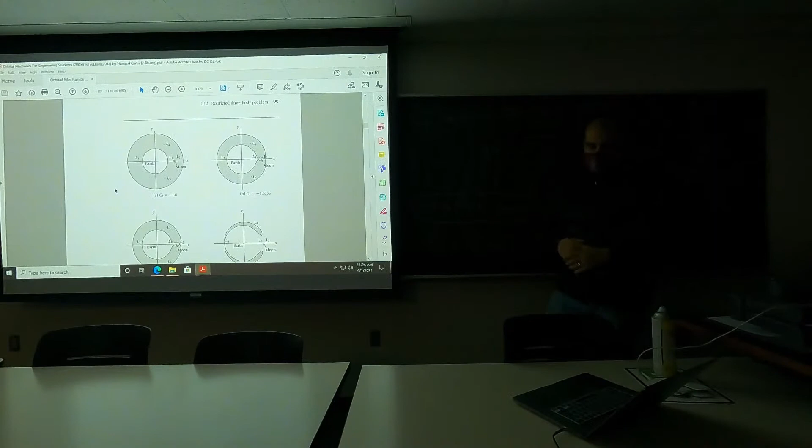We were talking about the first time we brought Lagrange points up, you said they have no eccentricity value. No, I didn't say they have no eccentricity, that was the Lagrange coefficients. We don't need to have eccentricity, that's the idea, we don't need to have them. But what I was wondering is, if we do have all the other values, can we still find the shape of the orbit? Yeah, sure.